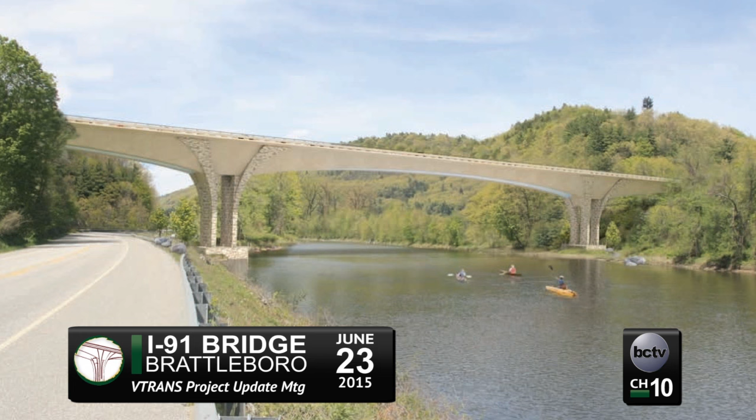During those outreach meetings, Windham Regional had a little concern about the design. It was a pretty basic design, but what we realized, as everyone else does, is that there's a lot of multimodal activity happening underneath this bridge. It's not only a very large structure, but unusual in that there's a lot of activity going underneath - you have Route 30, activity on the West River, and the West River Trail.

So with that in mind, Windham Regional approached VTRANS with the idea of collaborating on a new design to accentuate not only the I-91 corridor but also what's underneath the bridge, because that's something a lot of people are going to be looking at for a lot of years. To their credit, I don't know how it got by, but a lot of state agencies probably would not have welcomed or even entertained the notion of redesigning something like this.

But they allowed us to host a public meeting and establish an aesthetic evaluation committee, kind of an adjunct to our transportation committee, with representatives from both towns of Dummerston and Brattleboro, the arts committee, abutters on Route 30 close to the bridge, and committee members.

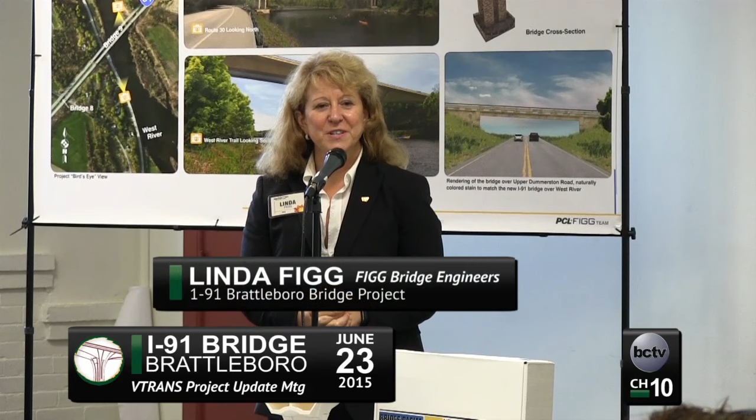Well, we are very excited about your new bridge. Your design build team includes FIGG Bridge Group, which I am the president and CEO of - we're handling the design. And PCL, with Caleb Lynn here in charge of all the construction, is going to share with you some of the details of the construction after I share details about the design.

It's very exciting because this is a unique bridge, really in all the world, specially made for Brattleboro in Vermont to reflect the beauty of this wonderful area. We've been showing some images, but I want to step through some of the details about the project.

So when we first started off, we kicked off in July of 2013 with the community, with the Visual Quality Advisory Team, and then a public meeting to share the details of the design that was put forth in the design build package. Our theme for the project was Vermont, a Bridge to Nature. And here are some other pictures from the public information meeting with displays and information about the project.

We were taken by the extraordinary beauty of this area. The bridge is set in nature, reflecting how it connects to the natural environment and the beauty of this area, including the recreational activities along the West River, the West River Trail, and the beautiful scenic gateway as it comes into Brattleboro.

This is the original bridge. You will remember it as two individual structures placed across the West River, with a 440-foot main span. The new bridge is 70 feet longer, at a 510-foot main span, creating much more openness because we've taken two structures and combined them into one, with dramatic singular piers on each side of the river hosting the structure across the riverway.

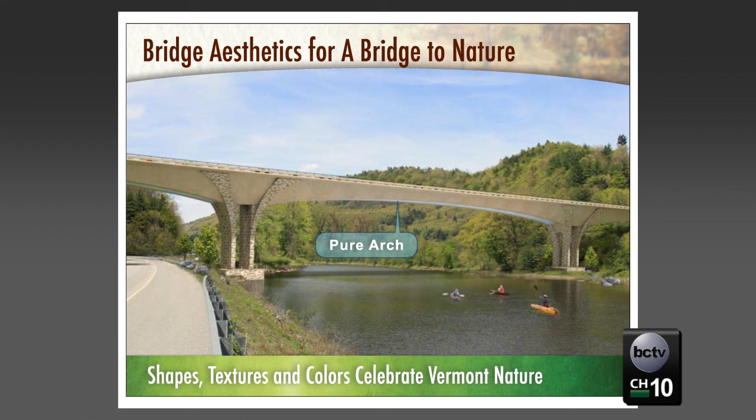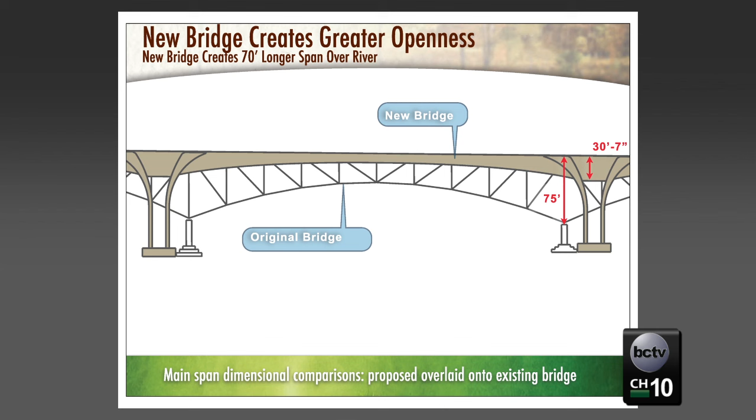We accomplished this using the form of a pure arch across the water, with shapes, textures, and colors that celebrate those found in nature as the bridge connects into the landscape. This is an overlay of the previous bridge and the new bridge, showing how much more openness this creates in the viewscape, opening up views along the river and of nature through less structure in the superstructure and more openness in the span.

Celebrating the beauty of Vermont and Brattleboro's natural landscape first involved looking at the native trees and plants and the beautiful rich colors, through a color study looking at different color palettes to ensure this bridge would reflect that site.

We also looked at unique features, such as the first state seal of Vermont, the white pine, which has 14 branches because Vermont was the 14th state. So having this bridge be reflective of Vermont, we included details of the white pine and other features in the structure.

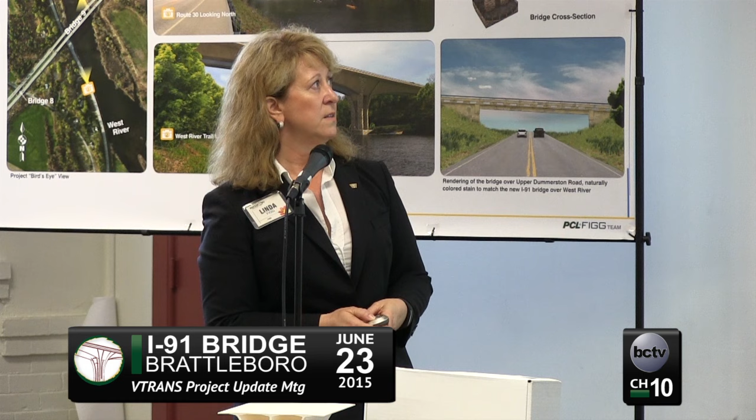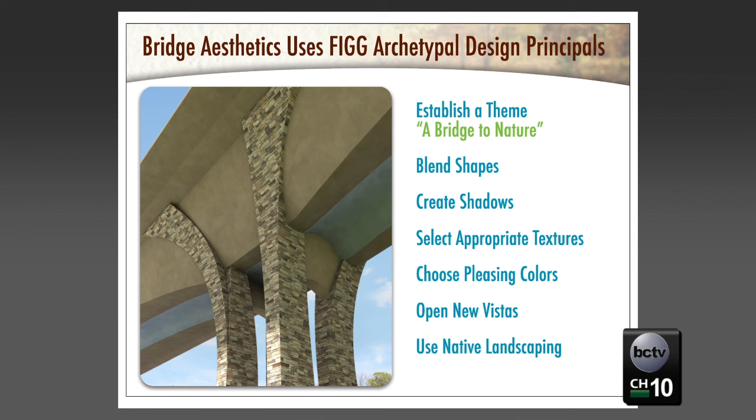We used archetypal design principles, starting with the theme of nature, blending shapes, creating shadows, selecting appropriate textures, choosing pleasing colors, and opening up new vistas for people driving not only underneath the structure but on top of it, being able to see the beautiful green mountains connecting to the riverways, and using native landscaping.

Another feature of the bridge is that the twin columns at each location not only create openness for the structure itself but allow us to eliminate temporary works in the river during construction. What you would normally see as yellow towers are no longer needed, so there is no temporary construction in the river. It's a design within the design that allows us to be very environmentally sensitive to the area.

The bridge itself is one structure with two lanes in each direction and very large shoulders. There is an open railing, which I'll talk about more. The cross section is a box girder shape, and the underneath side has a domed area, which you can see here.

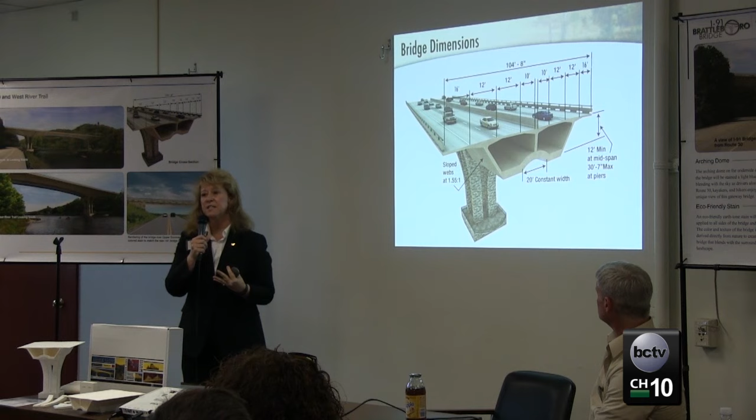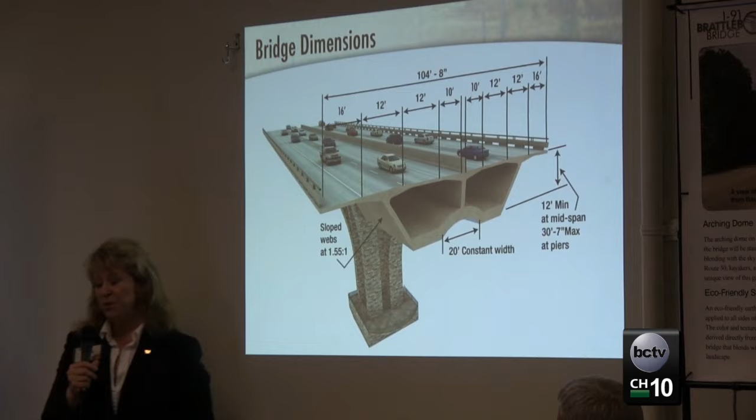You really get to see this from the underside when standing on the observation platforms at each pier location. This is a very unique feature that will allow people to come to the riverside and look at nature as a sort of gallery of the natural habitat, a viewing platform to enjoy the space underneath in combination with these 70-foot tall piers.

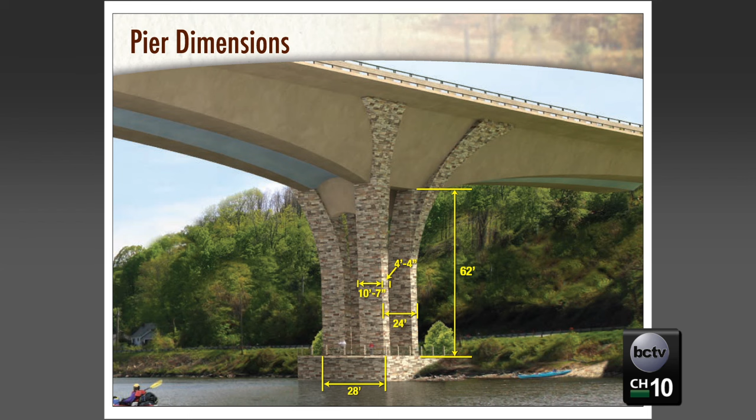The piers and platform, you can see here, are four individual columns shaped in a curving element connecting to the superstructure. They start together at the base like the trunk of a tree, then open gracefully, adding distinction to the bridge while opening the views of the surrounding landscape.

It is like a functional bridge sculpture, where the sculpted concrete is artfully created in relief with earthen stains to celebrate the beautiful coloring of stone and texture in the landscape.

And you can see it comes into the arching shape at the pier. The underneath side, in the dome area, we're going to stain a blue like the sky, so when you look up, it goes with the landscape of your view, which is the sky. Then you can stand on the observation platform amongst these grand columns, and it will be like an outdoor cathedral.

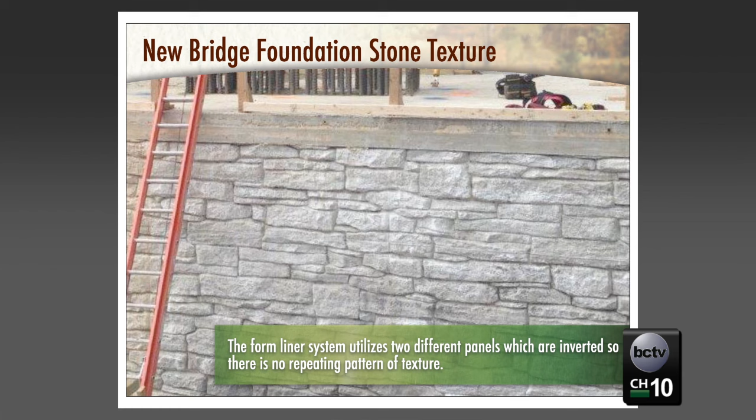Creating that texture meant really creating some strong relief in the molding of the concrete form. These are the patterns we're using. This is the actual footing, and by accomplishing this special texture with an inversion of different details, it creates a continuity of appearance without any unique patterns that are repeating.

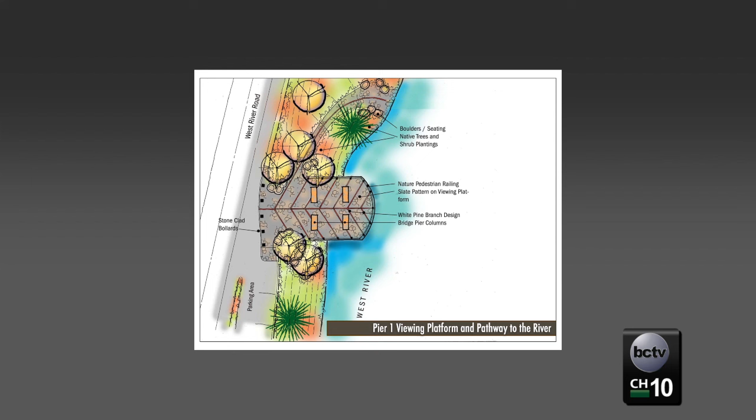This is a plan view. I'm going to share each side of the river. This is along the West River Road. Looking at this plan view, you can see the space for the viewing platform, and there's a pathway to the river along with native landscape.

On the opposite side, an identical platform, and here it connects with the West River Trail.

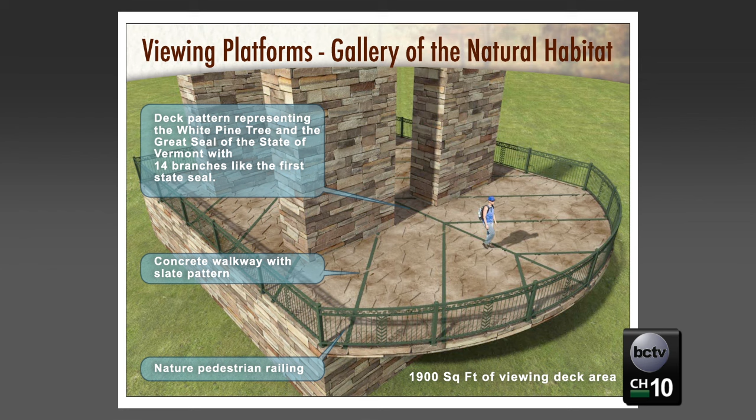If we take a closer look at this platform, which is really the top of the footing in which the bridge is supported, we make use of that as a 1,900 square foot viewing deck area where you can see the beautiful habitat from the area. The top surface is where you see the reflection of the white pine with the 14 branches. A special railing detail was accomplished working very closely with the visual quality advisory team, along with the colorings and details of the platform.

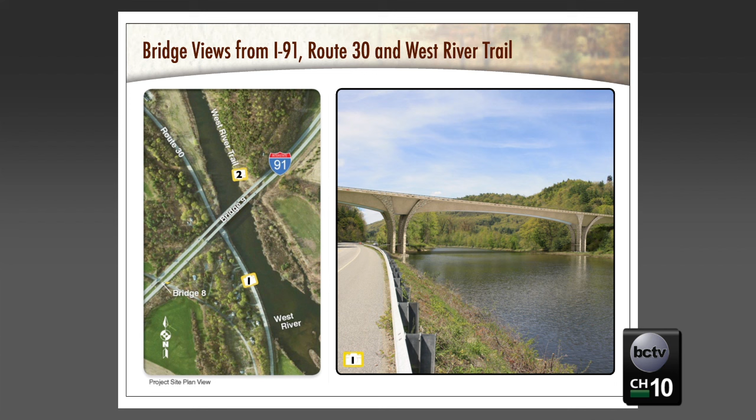On this left image we're seeing 2 specific views. View 1 is looking towards the bridge from the West River Road, and that is the view you see to the right. View 2 is from West River Trail looking in the opposite direction, and you can see the pier next to the West River Road.

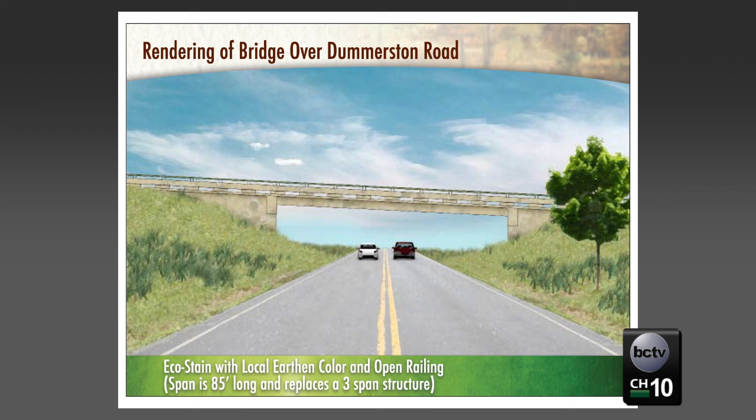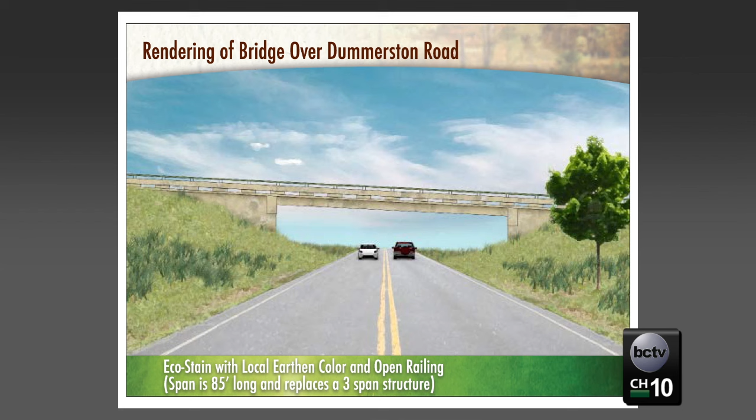Then up a little ways we have a crossing over Dummerston Road, and this will incorporate the same type of eco stain on the structure, blending with the natural colors of the area. This replaces a 3-span structure with one singular large span to create more openness and a greater opportunity for clearances.

Something that is very exciting is that Roads and Bridges magazine each year comes out with their top 10 bridges in America, and last year, your bridge was selected as the #1 bridge in America. This was a tribute paid by Roads and Bridges magazine, and it's an incredible honor and something to be very happy and proud about.

This has been wonderful, having the opportunity to work with the local community. This is a real tribute to VTrans and their insight and vision for really engaging the community in this process from the very beginning.

So we developed a visual quality management plan, and we've been working with the visual quality advisory team. These are 3 specific meetings beyond our kickoff meeting where we really looked closer at the details and worked on these together. We had one on May 13th and then April 22nd this year, and we're planning another one in August or September to finalize some of the other details on the landscaping and coloring.

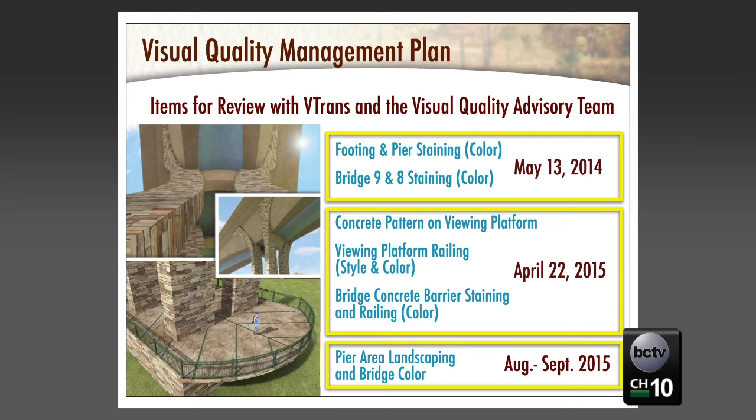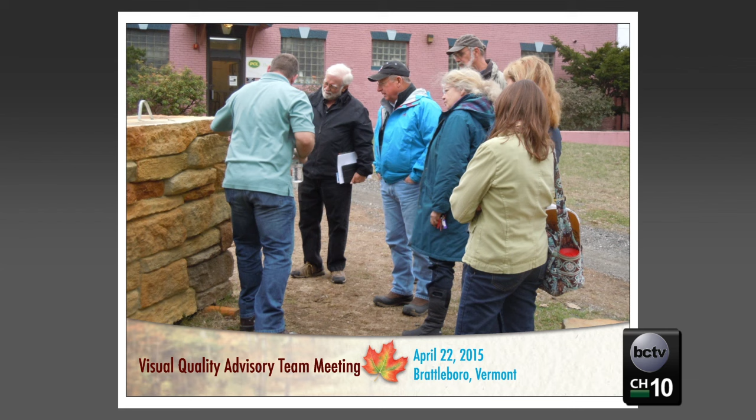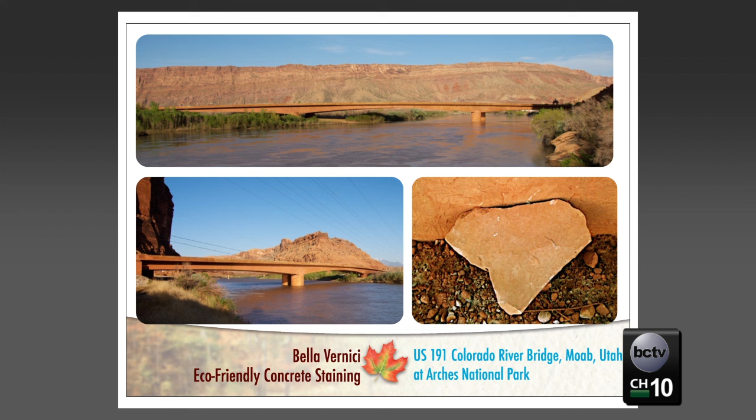It is a permanent kind of stain that helps create the proper coloring in the concrete that will match with the colorings of the landscape. This is another example where we used it at Arches National Park in Moab, Utah, showing how you can transform the color with this eco-friendly staining.

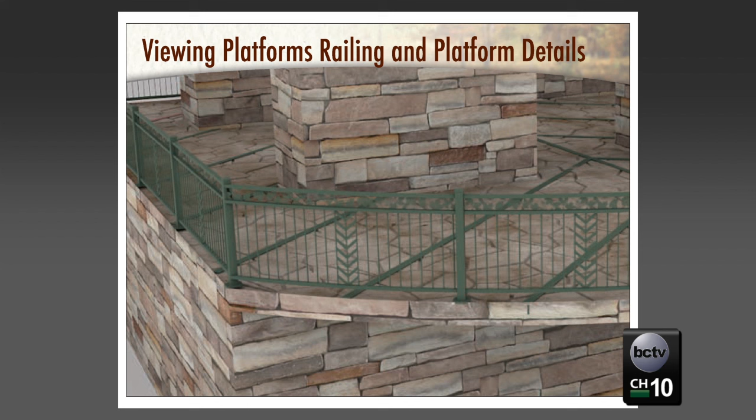If we take a closer look at the viewing platform, this is a recent selection by the Visual Quality Advisory Team of the railing details along this platform. At the top will be a celebration of various native plants and trees, the leaves and details from those, with information so people coming to the viewing platform can learn about the different native plants in the area. Also, the white pine is celebrated in the middle with 14 branches, and we selected a deep green color with the visual quality team.

There'll also be nice open railings as you're driving into Vermont, to really open up that view with a lot of great sights through there, again matching the overall color themes. This was selected by the Visual Quality Advisory Team.

This is really a bridge to nature, a bridge to the area, a bridge to Vermont, to Brattleboro, to the overall region. It's a celebration of all this wonderful, great quality of life. There's a lot of information you can gather along the way as this continues to be built.

There's a website that features the latest news, renderings, and construction information, which is updated regularly.

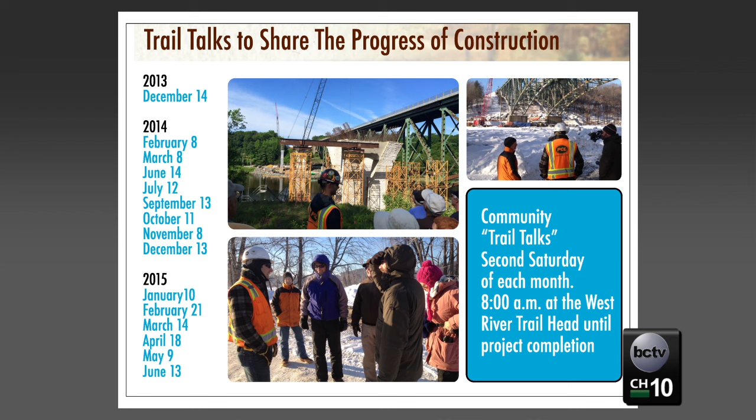On the second Saturday of every month, all the way through project completion, you can meet at 8 a.m. at the West River Trailhead for a special tour of the construction. You can see on the left side a listing of the dates these tours have been going on. We welcome everyone in the community to come out and really see the details of this bridge going up.

There's the Vermont 511 website and Twitter feed, which provides up-to-date traffic information and reports from the Traffic Operations Center. Also, the Friends of the West River Trail has a link to the project, from the project to the West River Trail.

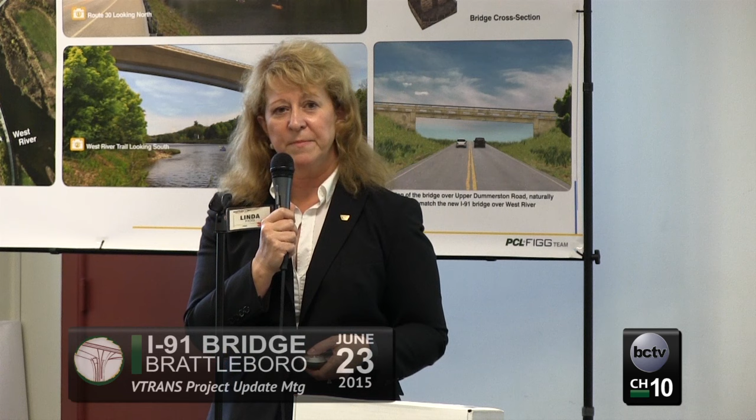We're very excited about an educational program coming this fall with the new school year for the middle and elementary schools in the region. This is what we call the Bridge Basics Program Kit, an educational kit we worked on with the National Building Museum in Washington, D.C. It helps teachers use this as part of a STEM program to encourage math and science.

This one is specifically customized to include your Brattleboro Bridge, and we have models that are inside. This is actually a model that's been put together already. You'll see in front here the pieces of the model, and it allows children to put the models together and learn how the bridge is put together. We're very excited about that.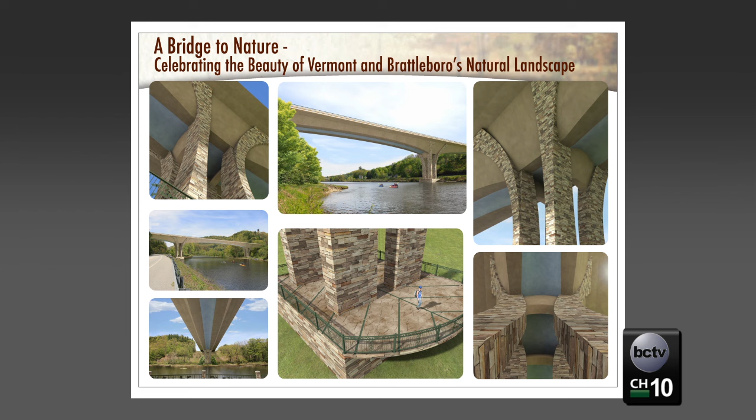Representatives of FIGG and PCL will visit the local schools this fall, talk about your bridge, go through the educational program with the teachers, and really get the children engaged in the elementary and middle schools, all about this wonderful new infrastructure in your area. We're very excited to be providing this bridge for you in design, and very excited to be working with the local community on it. It's a real tribute to this community and all the beauty that is here.

Thank you so much, Linda.

So a little bit of background also on how we got to this point, and maybe the reason we're getting some of these kudos directed to VTRANS, is we did have a sense of urgency, and we have been striving to be more and more innovative.

One of the ways of doing that is we used to use the traditional design-bid-build process, which, you know, we would get in the office, we'd do the design knowing what we needed, and then we'd do the permitting, and then we'd bid it out, and then we'd bring on a contractor like Caleb, and low bid would win, and they would build the project. And there was really no dialogue between the designers and the builders when it came to a complex project.

Not only that, it takes time to get through that entire process. We had just had legislation passed with the help of the legislature on utilizing design-build, and this was one of our third projects. The first one was actually down at south of exit 2, and then there was this one. What that enables us to do is compress the time from design all the way to construction and hit the ground sooner.

Just getting into some of the details of the construction. To talk to what Rich said about the design-build process, we worked with FIGG through the design-build proposal, and we submitted a proposal to the state, which we would call at a 30% design stage in roughly January, February of 2013. We were then under contract by May 2013 and hit the ground running by September, October 2013.

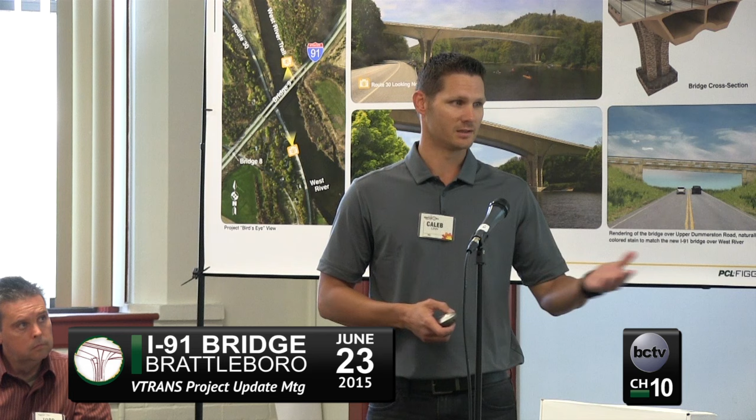So to speak to the expedited process of a design-build construction, you're looking at going from a 30% design, where you don't have permits in place, to actually on-the-ground building within a 7 to 8 month time frame, which is a very compressed time.

It's great for VTrans to recognize that process, and that you can really expedite that design-build process. So let's speak to some of that.

Let's talk about some of the things a lot of us already know is done. We've demolished the northbound structure, as we're all fully aware, but that was the first thing we got going on out here, and we had to do that in order to provide us the alignment, the space we need for the new alignment of the structure.

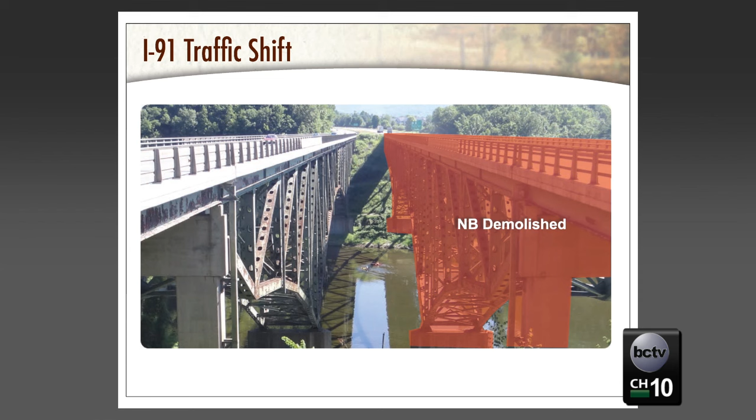How we did that: we took the concrete deck off first, put a crane out there. A 110-ton crane sitting up on top of that existing bridge, especially when we separated it at the center and still had the crane sitting on top of it. I can assure everybody that's very safely engineered.

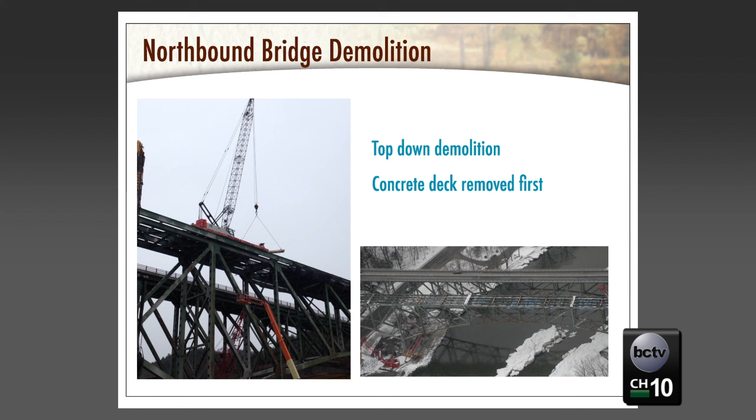We were all up there quite a bit as we worked through that. That was through the winter of 2013-14, our first winter here, which looks just as bad as the last one we had here. Construction-wise, that's right.

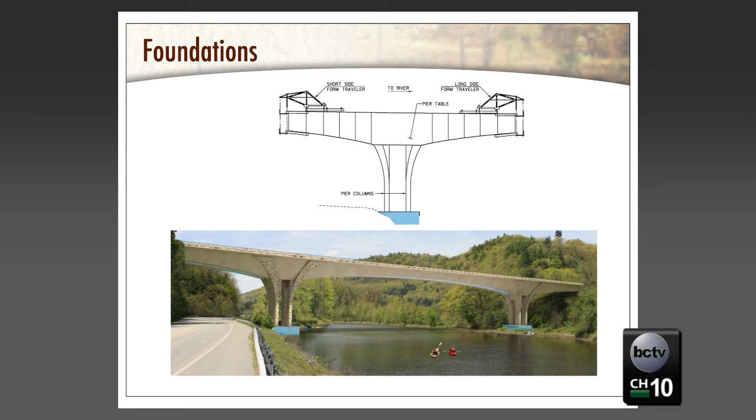Concurrently with demolition, we did build the foundations of the structure. You can see here highlighted in blue, these are the footings and the drilled shafts. These are the main structural supports of the main structure. We constructed these through that winter of 2013-14 into the spring.

The bridge is founded on what we call a drilled shaft. It's 66-inch diameter, 8 on each side of the river. They're drilled all the way down into bedrock. You drill 16 to 20 feet, depending on where you're at, into the rock, and then you have an unsupported, overburdened condition in the soil. Once those are constructed, you put the footing on top, which is here.

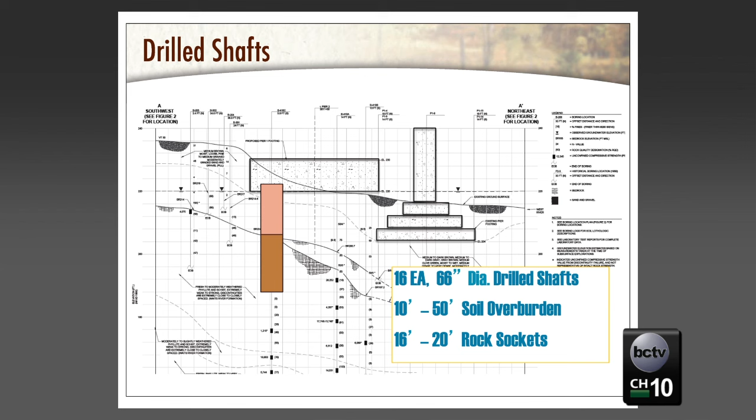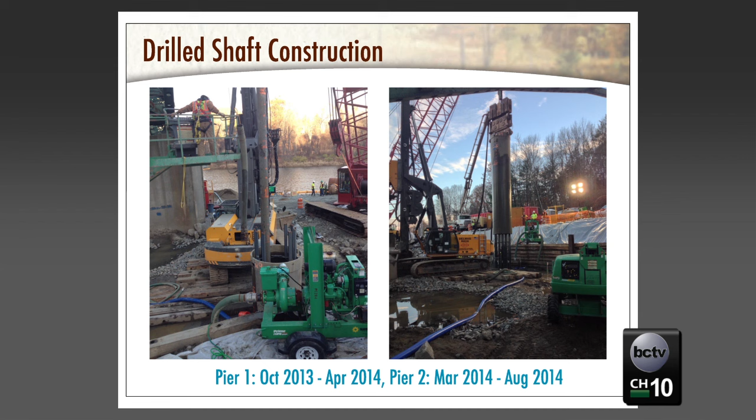Some pictures of that drilled shaft construction, which is now complete. We have our temporary casing that we put in the ground. We go in with a drill rig, drill that hard rock out, which is a tremendous undertaking - very, very high strength rock. Then we install a rebar cage into the center of that casing, which you see here being set by the crane. Once that rebar cage gets set in there, you pump concrete into the hole.

I'm oversimplifying it, but when it's all said and done, you have these drilled shafts sticking up out of the ground. They're embedded into rock, and those provide the foundation for the structure. The footing sits on top - this is the existing structure here, so we are building behind it. That's a component that allowed us to expedite construction with the design.

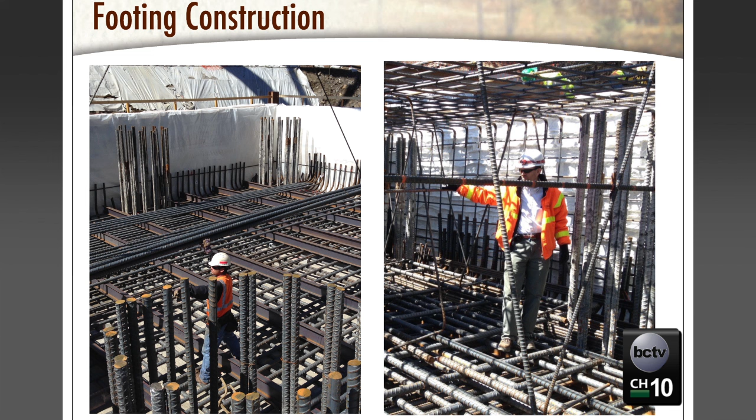Heavily congested rebar. This footing had number 18 rebar in it, which is the largest size rebar that they fabricate - heavily reinforced, to give it that solid foundation.

There's Gil Newberry, VTrans inspector, hanging out inside the forms there. This is on pour day. This is a very large concrete pour - they consider it mass concrete. The concrete pour took us around 10 to 11 hours, starting in the morning, finishing at night.

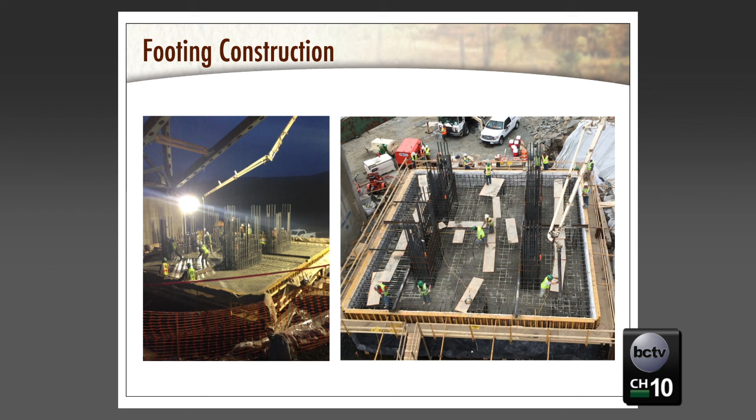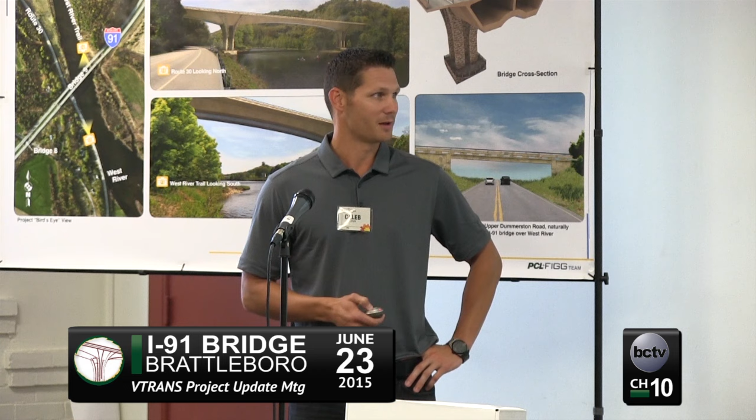A lot of flagging over on Route 30 - some of the traffic restrictions we talk about when we communicate what's going on during those flagging operations with short traffic interruptions. A lot of work goes into getting in those foundations, but they're the most important parts. Without a solid foundation, you're not going much further. This was completed in the spring of 2014.

And then there's your finished product with the footing there. This is on the Route 30 side. You can see that rock facade. It looks white - most of the concrete you see for our substructure looks white right now, and we've been asked a lot about that on our trail talks.

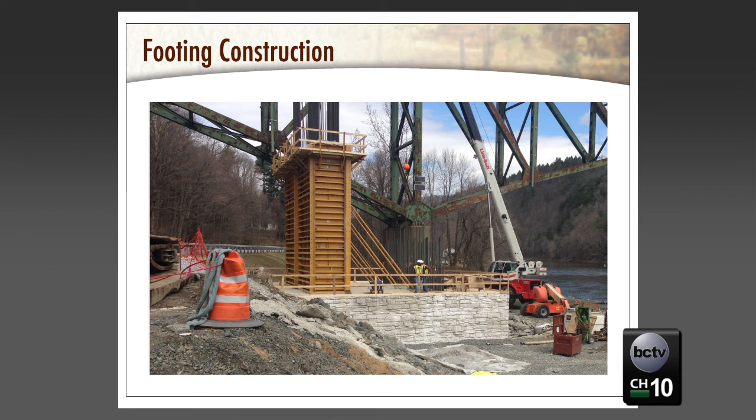The reason it's white is because we put a surface on the inside of our forms that helps us strip those forms, and it's a combination of soap and talc, like the weightlifters use - the white powder.

You mix that up in a bucket, coat it on the side of the forms, and that allows you to strip it off. It's environmentally friendly, and it helps those forms get stripped easily and moved to the other side. When we're done, before we stain, we wash that substance off, giving us a nice clean surface for our subcontractor to come in and put the stain on and turn it to what color it's supposed to be. So don't worry, it's not a white structure.

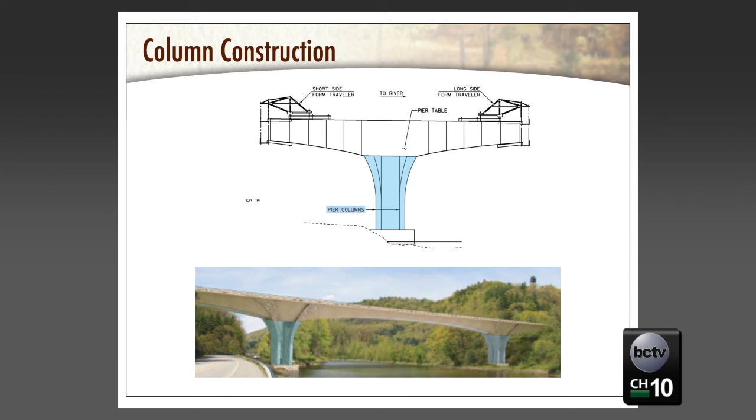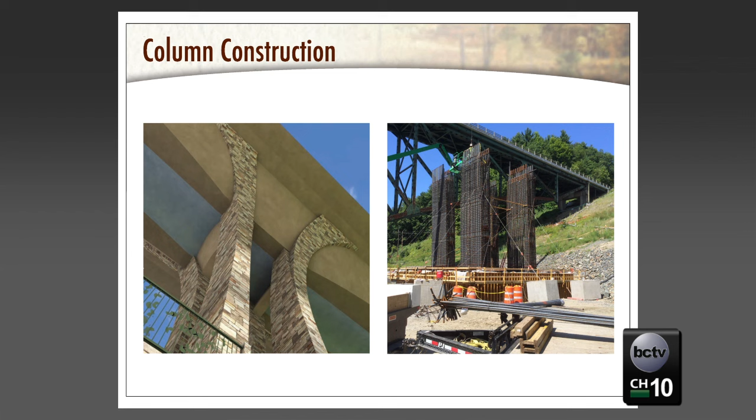The columns are also complete at this point, but we'll show some pictures of their construction over the course of the last year. A heavily reinforced substructure. The picture on the right shows the rebar coming up out of the footing, the first lift of the columns. You see the density of the rebar, very important to make those columns stiff for construction.

Some progress photos here. We used an EFCO form system. Some of the forms are rented, some are purchased custom for this project because of the curvature of the job. EFCO supplies those forms for us, and we work hand in hand with their engineering group to make sure we've got the proper strength for that form system.

There's some finished photos of the curvature of the columns. You can see there's only one flat face, very, very challenging construction. It's critical that the geometry is where it's supposed to be from an alignment standpoint. Tolerances are very tight, and that substructure is your platform for your bridge, so you've got to make sure everything's where it's supposed to be.

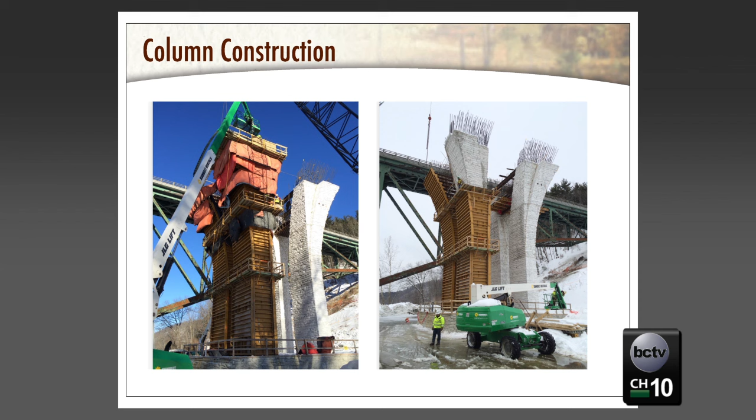We built that throughout the summer of 2014 and wrapped up just this past winter on the trail side. Here are some pictures of the trail side. We call that Pier 2 of the completed structure.

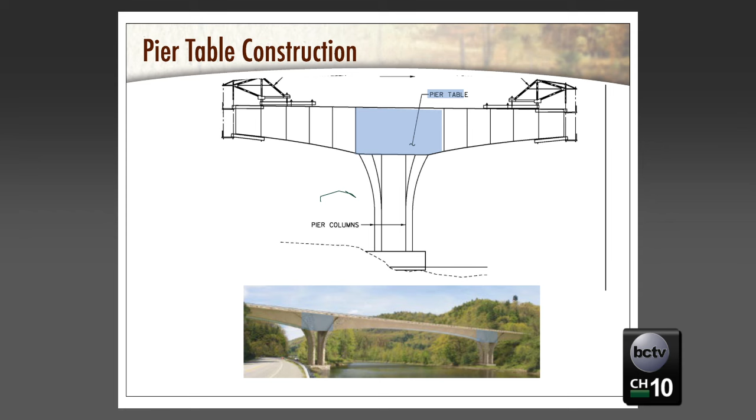The pier table is the component we've been building over on the Route 30 side since last fall. That's the one most people are familiar with. You saw the yellow false work towers that got put in place. This is all temporary works. When Linda showed that image of temporary supports that potentially would have had to be in the river, this is the type of system she's talking about.

We avoided that with the segmental bridge we selected, so we only had to put that in around the causeways. We'll talk about our form traveler in a minute, which allows us to eliminate this from having to be installed into the river or in other locations on the job.

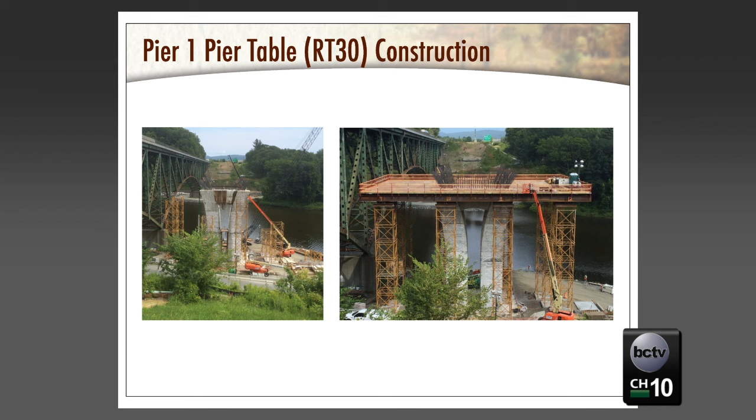Step one, we installed this false work system that supports the formwork for that pier table. It's a very, very large structure. On the trail talks, Garrett compares it to the size of our office building over there behind the marina in relationship to what's out there. When you're underneath it or up on top of it, it's just a very, very, very large structure. This is really the anchor for our segmental construction.

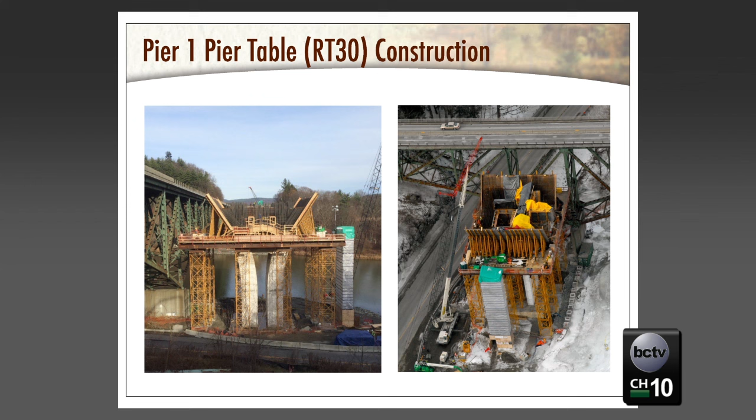I'll go through that process, but it's a very critical component of the job. A lot of geometry involved, and alignment's critical, and you've got to make sure we get it within the tolerances so that moving forward with the segmental construction, everything ends up where it's supposed to be. This was a very good time on the job because the winter of 2015 was ending. It was an awesome winter for Vermonters, but very challenging on the job site.

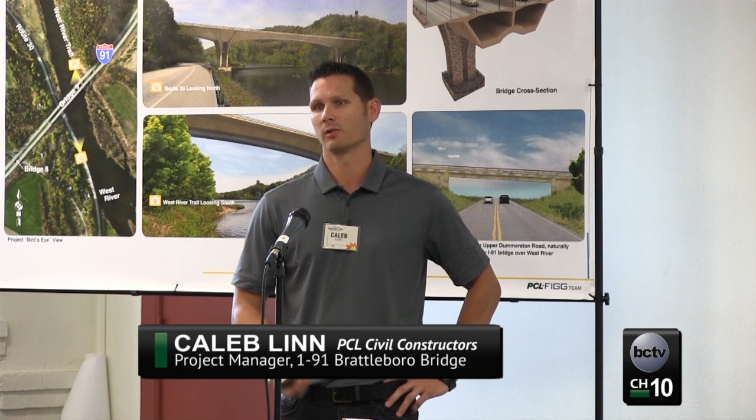This is the top deck. You can see stainless steel rebar, another component VTRANS incorporated into the job to help with the service life of the structure, adding to the 100-year design life. That way, a long time down the road, if you do get some issues with water intrusion, it's hitting stainless steel rebar, which helps prevent corrosion and different types of issues. You can see it's heavily reinforced, and there's some duct here where the strand goes in for our post-tensioning, because it's a segmental bridge.

And this is the day of the pour of that deck. You can see we use a screed, it's a mechanical screed that you run on rails. You pour the concrete and bring that across, and that gives it that nice, flat, smooth surface. It was a gorgeous day for that pour. We were all very happy, it went very, very well for us.

So that's the structure as it stands today. The next critical part after we got the deck poured was to take this entire false work and formwork system and get it on the other side of the river as fast as possible, because that's what we call the critical path of the job. That's what drives our schedule.

So we designed a system called a strand jack system that allowed us to lower the whole system at once, and we took the bottom towers out first. We lifted up a little bit, took the bottom towers out, then dropped it down piece by piece. That allowed us to start putting these towers up on the other side of the river before we had all the formwork in different parts removed. So again, just helping expedite construction, getting things moving forward as quickly as possible.

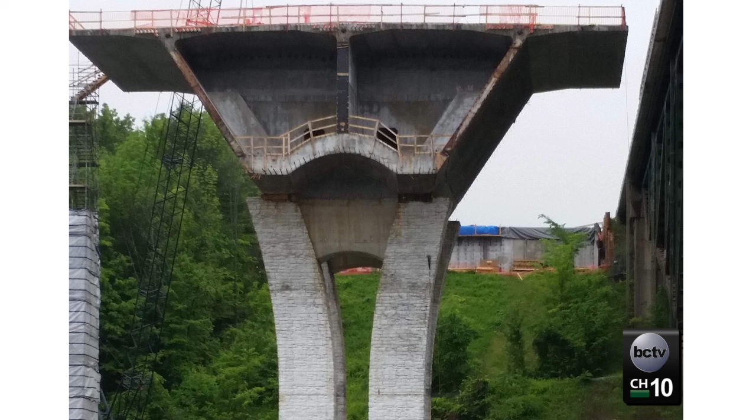And then it took us about a week and a half to get all that removed. And that's basically the finished product of the pier table.

Really cool, significant structure, and that's about to be covered up by a form traveler that we just started erecting last week. So this is over on the trail side now.

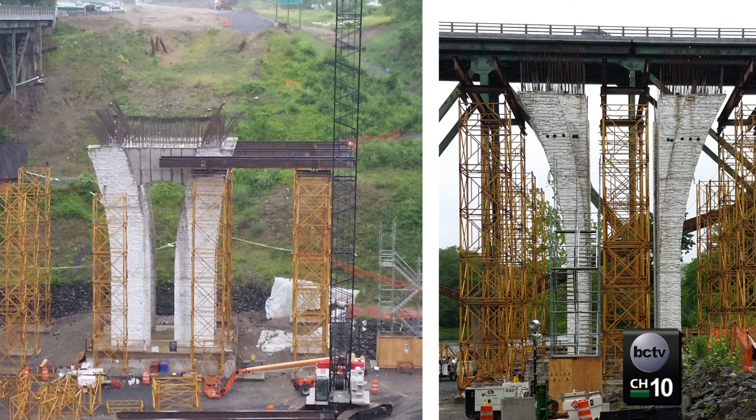You'll see the exact same construction you saw on the Route 30 side happening over on the trail. People coming to the trail talks will have a really good view of that work activity, and we'll have a lot of good stuff to talk about when we're out there. That activity will take place for the rest of the summer. We'll be building that second pier table and be wrapped up by the fall.

So segmental construction - this is something we want to focus on a little bit during this meeting from a what-to-expect standpoint. The segments are built with what we call a form traveler. That form traveler is supported by the structure itself. So this is that component where we say we don't need supports underneath.

For someone, a passerby who's just going by, might be very surprised when they come on Route 30 and see a bridge hanging above with no supports, right? If you don't know the engineering behind it, that could be concerning.

So the way segmental construction works is we build one segment at a time with this form traveler system, and then we stress it together with strand, and it gives it a very rigid construction. There's no concerns whatsoever of the structure falling or any safety concerns. It's designed that way, it's been done many times. Segmental bridge construction has been around for a long time, and it's a very successful type of structure.

So those segments are built in a balanced cantilever fashion. As we get out, we go to the center of the river, and at the same time we're going back towards Abutment 1 over Route 30. When we're done with that Pier 1 side, we take our form travelers and jump them to the other side of the river on the trail side, and we do the same balanced cantilever construction, cast-in-place segmental construction. And then when it's all done, we have what we call a closure pour, and that locks the bridge together in the center and at the abutments.

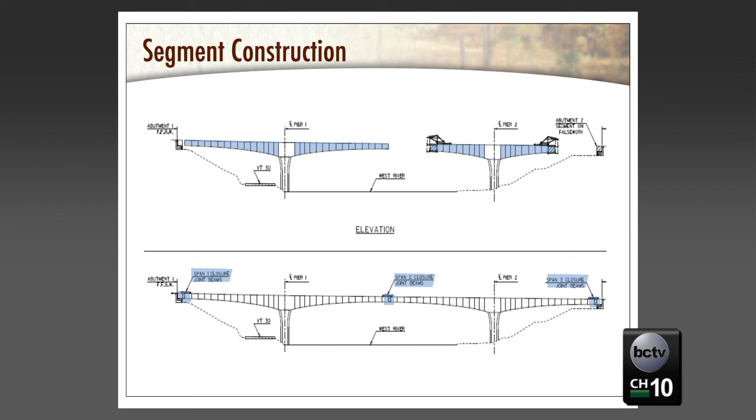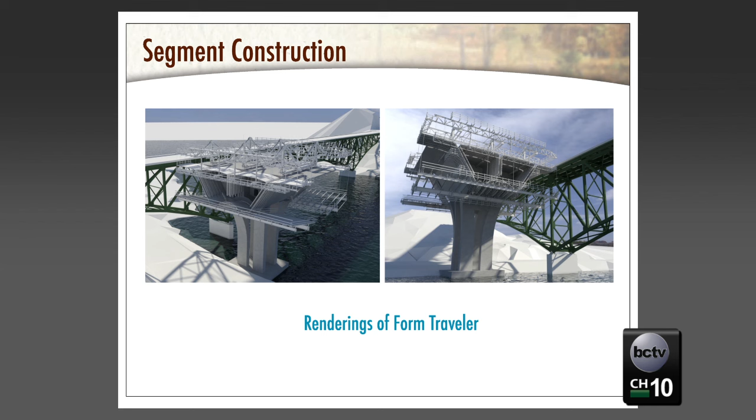So again, just to talk a little bit about the form traveler, this is a rendering. I don't know why our engineers decided to make it look like Antarctica for the renderings, but I think it must have been done in the middle of the winter. So this is what that form traveler looks like from an engineering standpoint.

This would be the pier table, the component that's complete. And then there's just steel trusses, PT bars, platforms. It's basically just a hanging formwork system that's supported by the structure already in place, and it's on rails. These rails run along the top of the bridge, and each time you cast a segment, you launch out on those rails, and then anchor it down to the structure behind you.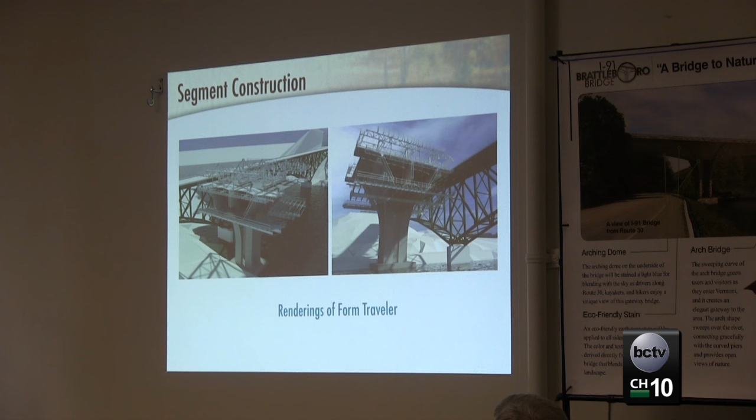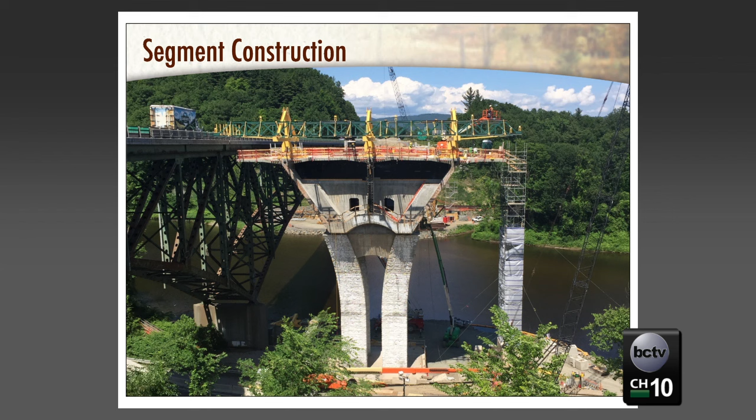There's a good picture of when we say there's a cantilever. These pieces that are cantilevered out over the structure. I think at this point, this is right along the edge of Route 30, and that'll keep extending out towards the abutment.

And so each time we pour a segment, we pour 16 feet at a time. Once that's stressed back, it's tied together with steel strand. Then we launch that traveler ahead, retie it down to this structure that we've just poured, and then keep jumping forward in a balanced cantilever fashion.

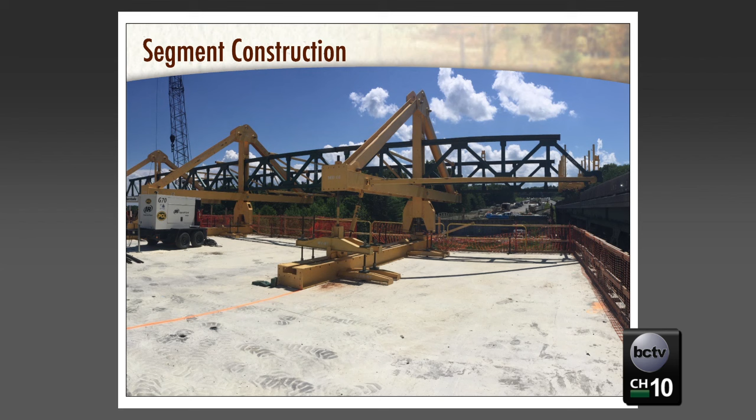Here they have a heating system in place because this is in the winter. But again, just no supports underneath. For us, you may have Route 30 right here driving right into this thing, supported by the bridge.

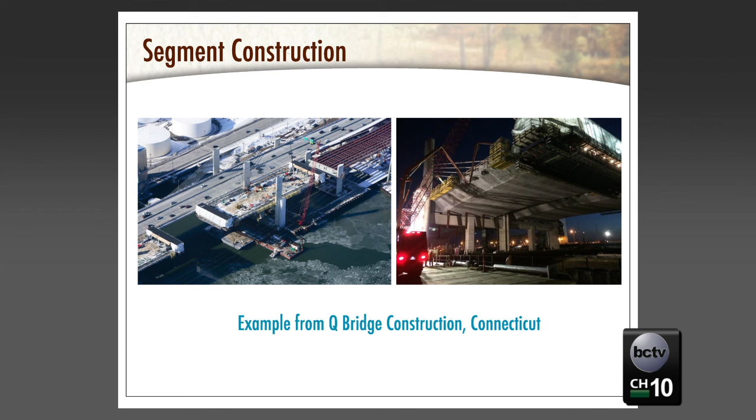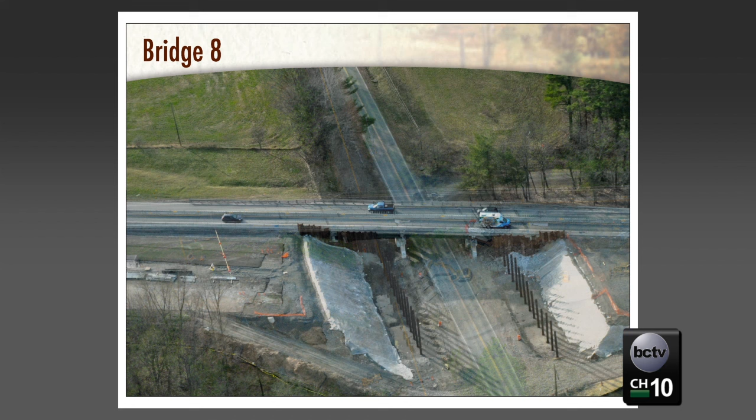So in Upper Dummerston, we have Bridge 8 that's under construction. We've already demolished the old structure. We did that beginning of last summer. And to date, we've installed the foundation piling for that. And just here in the last 2 to 3 weeks, started building the MSE wall.

So for those wondering what that was going to look like as you come across Upper Dummerston, these panels, which will have that same stain that we talked about for the bridge, will go all the way up. These piles aren't that high, they need to get cut off, but that'll be your view as you come underneath. So those MSE walls should be built here within a month, and we're going to start working on Bridge 8, and the plan is to try to have Bridge 8 complete by the end of the year, this year.

So that's it for the construction update. And I'm going to kick it over to Todd for traffic management, unless anybody wants to ask me any questions.

Good? All right. I want to emphasize that the big thing I wanted us all to be learning about is this construction that's going to leave people feeling that they're going under a bridge that's hanging out there. And, you know, we kind of want that message out that this is safe, this is what you're going to be seeing, and keep your eyes on the road.

Yes. And it's going to be different and unusual and perhaps disconcerting, but we have no reason to be feeling that way. None whatsoever. I'll reiterate, keep your eyes on the road. We're concerned about that. That's one of the fundamental reasons we wanted this level of education.

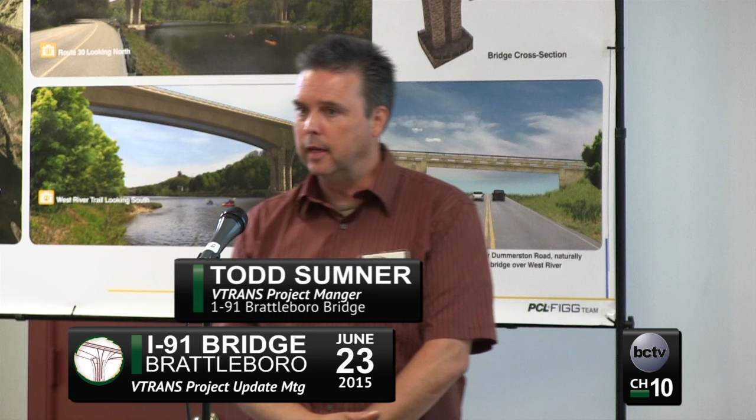As many of you may remember from this past winter, I-91 southbound had a tendency to back up on Sunday afternoon during the ski season. That was caused by, if you remember correctly, if you're heading southbound, the interstate narrowing down to one lane just before exit 3. And you had a lot of vehicle friction between that increased traffic heading southbound at that time and vehicles merging onto I-91 from exit 3. That was kind of what was causing it.

Now, VTrans, to help mitigate this, took action to close exit 3 on-ramps, detouring traffic north on US 5 to exit 4, and traffic south through downtown Brattleboro to exit 2. Ended up being a success, because the queues were not happening on I-91 South anymore.

And as a result of that success, we hired a traffic consultant to take all the existing data and analyze all the traffic data that we had, and make a determination of whether or not that successful model could be applied to more of a weekend. We also wanted them to look at ways that we could improve that model. The analysis came back, and yes, it was a reasonable and feasible option to do for Memorial Weekend.

We only had time to implement 2 of those recommendations. One was putting portable message board signs on Route 9 west of Exit 2, informing drivers that I-91 would have delays and encouraging them to use US 5 north as an alternate route. The other was detouring traffic from Exit 3 down to Exit 1 instead of Exit 2, which alleviated a lot of the backup at the intersection of US 5 and US 9 in downtown.

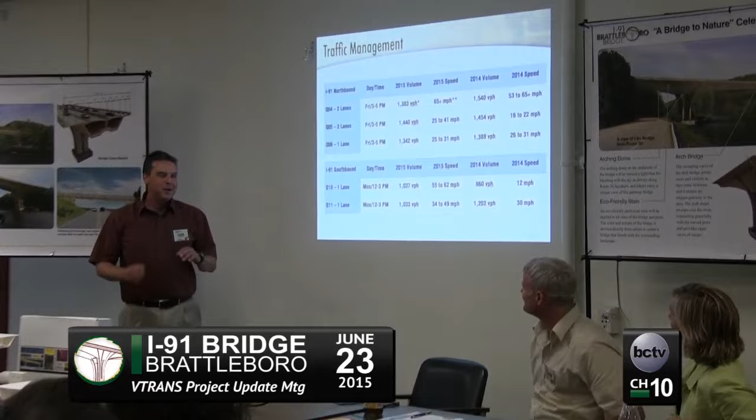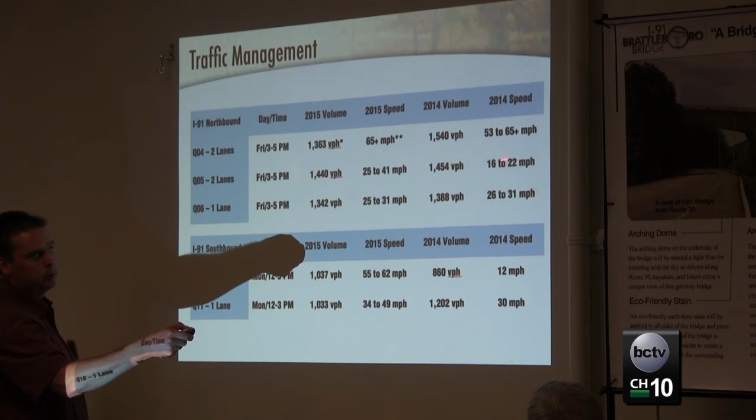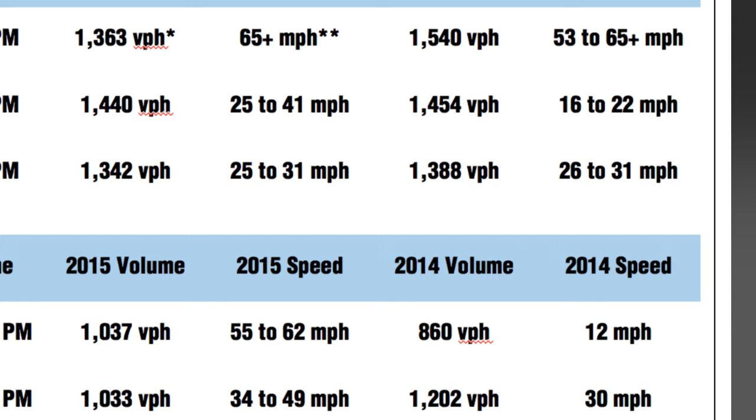For Memorial Weekend, when we put that portable message board down on Route 9 to the west of exit 2, it improved slightly. In 2014, the average speed northbound at that time was 16 to 22 miles an hour, and we improved it to 25 to 41 miles per hour. When it's going 10 miles an hour, it's clogging. When it's going 20 to 40, it's slower, but it's moving. So we see a significant improvement.

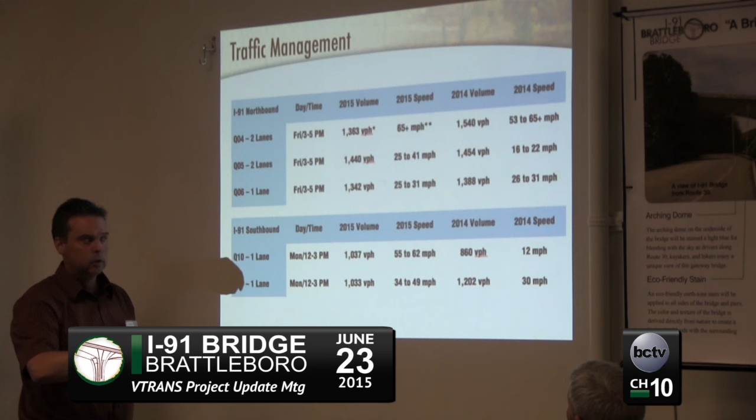That's what he meant by the term success in terms of I-91. And also when we close exit 3, this is the big change. When we close exit 3 last year, when it was down to one lane in that area, right where we're merging with the southbound stuff, speeds averaged 12 miles per hour. On Memorial Day weekend, we got 55 to 62 miles per hour, that range. So there's a great improvement in that, by just doing that.

Just putting the portable message board signs on Route 9 was something we're going to do to help mitigate that northbound traffic and that friction at exit 2 when those cars had a north merge, Thursday and Friday. The exit 3 closure is going to happen on Sunday afternoon.

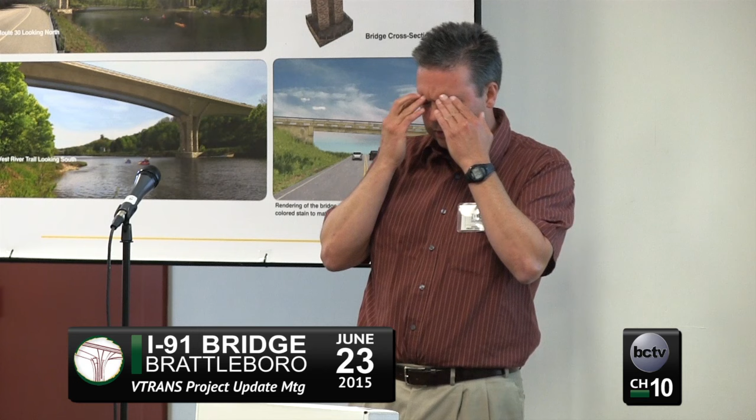Again, the difference between this time and Memorial Weekend — I think Memorial Weekend we went from 11, we went to 11 to 6:30. Whereas, just because, like I said earlier, the higher traffic volumes have a longer duration for 4th of July, we're going to have to run that closure, I think, from 10 a.m. to 9 p.m. at night in order to alleviate that longer duration.

And then the exit 3 is closed the following Sunday as well, the 12th, for the bridge inspection. Due to the pier table being on the north lane, I don't think the bridge inspectors can get to where they need to if we close that one, so I believe it'll be south.

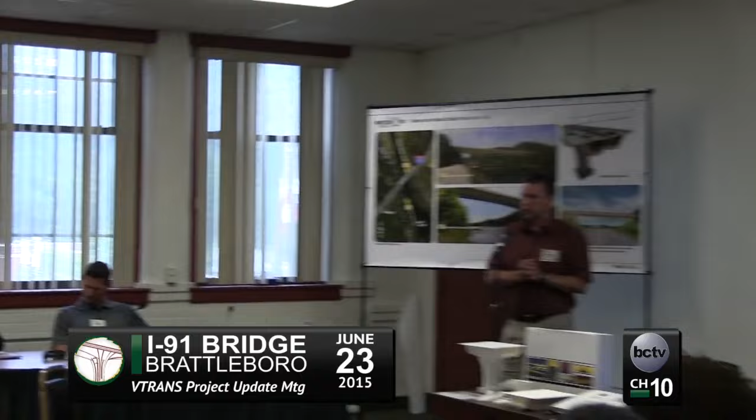Right now we're having VHB continue to look at some of the data to verify the numbers, but I don't think it's a big deal which lane we close. Tentatively I would say that we are going to close the southbound lane and keep the northbound open. Which is a little bit different than the Sunday afternoon closure of just the on-ramps that we were talking about for the 4th of July, or July 5th, I should say.

Other questions or comments? You had said, I think, early morning hours for those inspection closures. My understanding is it's 5 a.m. to 9 a.m. on Sunday morning, because we want to avoid what happened last time — there's just way too much traffic to be dumping all in downtown Brattleboro.

Hopefully it will be much less so. I think it's critical to point out, as Eric said, our engineering firm is doing the analysis, but it's critical that we solicit input for influences that we might not be capturing for a Sunday morning. So I know Eric plans on reaching out in that regard before. That's kind of the point of this, yeah.

I'll just note that since you were here last time, Secretary, there's been way better communication, I think. Town manager certainly thinks there's been better communication. As long as PCL is communicating effectively with the town manager and other department heads, hopefully we can avoid a repeat of the gridlock we had when both lanes were closed midday.

Right, we have someone on the radio trying to announce all of this. We're trying to use every media outlet we can. And by the way, the New Hampshire DOT — we haven't done this before now, so that's actually something new — because on July 4th, a significant part of the traffic is coming from New Hampshire. So we're in communication with them to put their variable message signs out. Hopefully we can reduce some of that flow, which really will help alleviate some of the impacts.